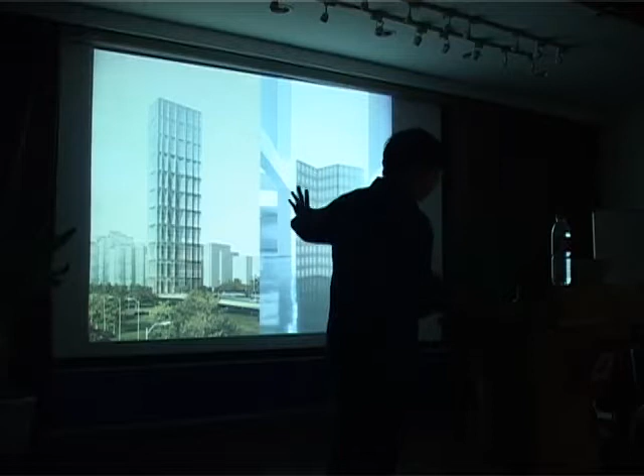We'll talk about the other project though. So what you're looking at again, in dimensions and scales—this one on the left is 200 meters tall, the one on the right is 2 meters tall. Formally they may look similar, but of course they're different projects.

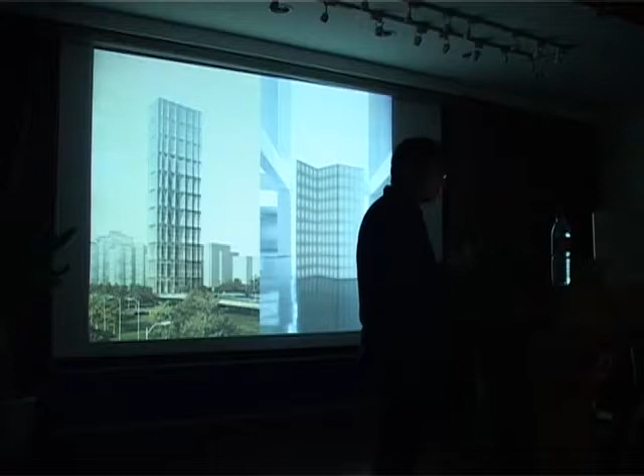But I'm arguing that, in fact, it's really not 可大可小—you're either big or small. For design to really make sense, to make architecture something meaningful, you have to take care of the urban scale as well as the micro, the material scale.

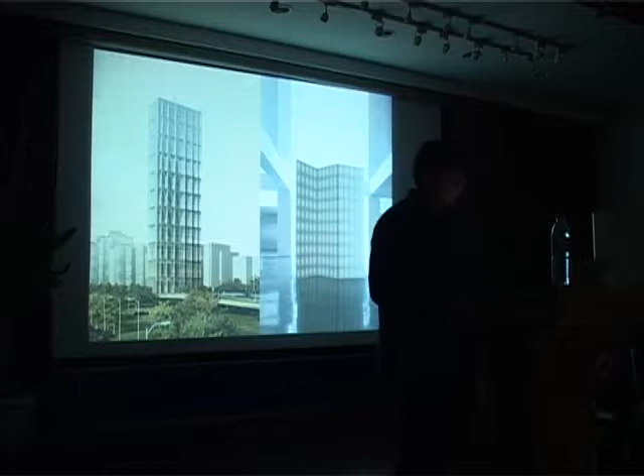So the real focus of this presentation really is from Metropolis, the two M's, M and M. So anyway, I'm going to show you a series of projects to give you an idea of the two scales. But again, really the important part is what issues these scales would bring.

So the first project is in Beijing, and you see Qianmen, the front gate. We're doing an urban regeneration, urban design project.

Actually, if I could have a laser pointer by any chance. If not, that's okay. I don't know—I have a device up here. I don't know what it is. Probably... excellent. This is a little on the stylish side. All right.

Okay, I was talking about Qianmen, which is right here. This is Qianmen Square, and this is the central axis of the city of Beijing. So this street is Qianmen Street.

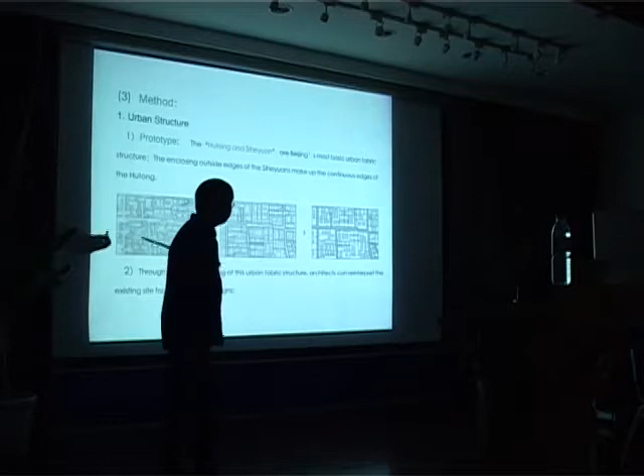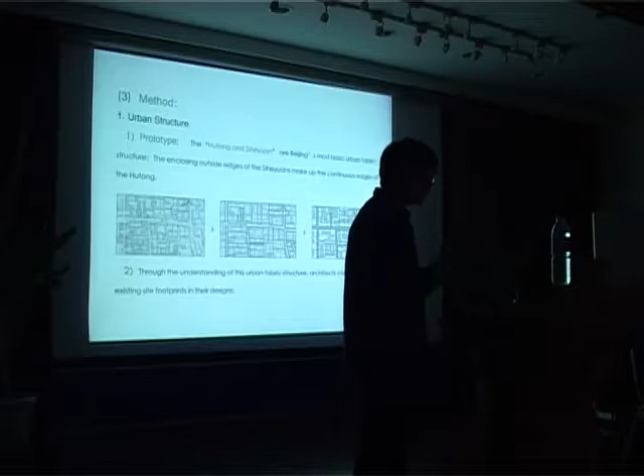So we started by looking at some old city maps, and that's from the Qianlong era—a very accurate map of Beijing. That's one of the major little streets. It's very narrow, but in Beijing people's minds it's no longer a hutong but a little street, called Fresh Fish Mouth, 鲜鱼口, because that's where the fresh fish used to come in. We were studying a number of things, particularly the scale and density.

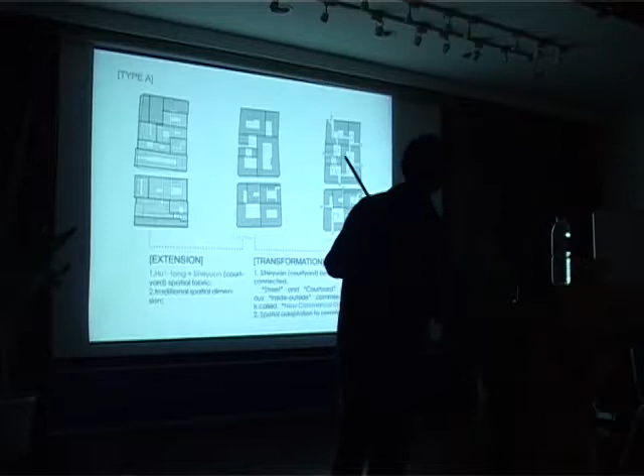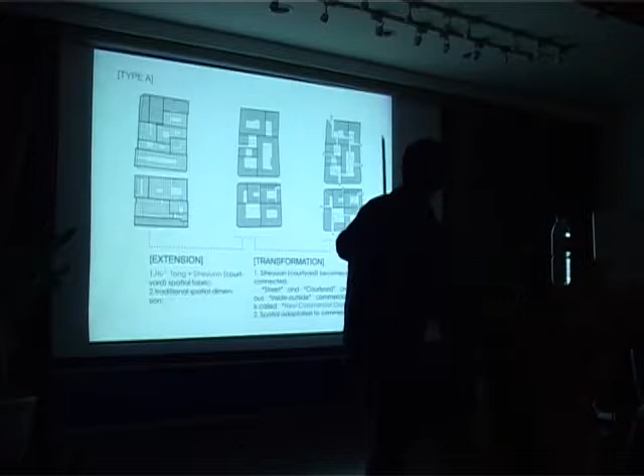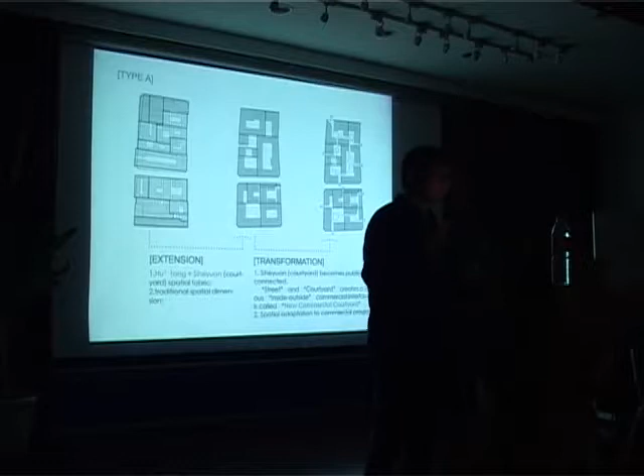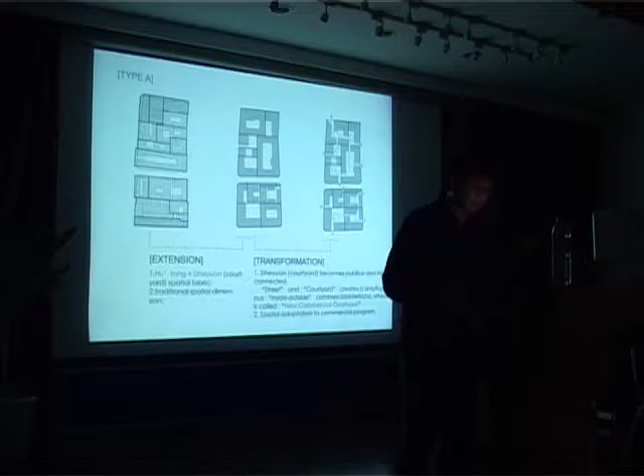And then we developed a number of strategies. Since the old courtyard houses are gone, we used only the footprint to generate the floor plan for the new architecture, and reorganized the courtyards so that people can go in and go through all of them without getting lost. Since it's public and commercial, the new way of experiencing the courtyards really has to be different.

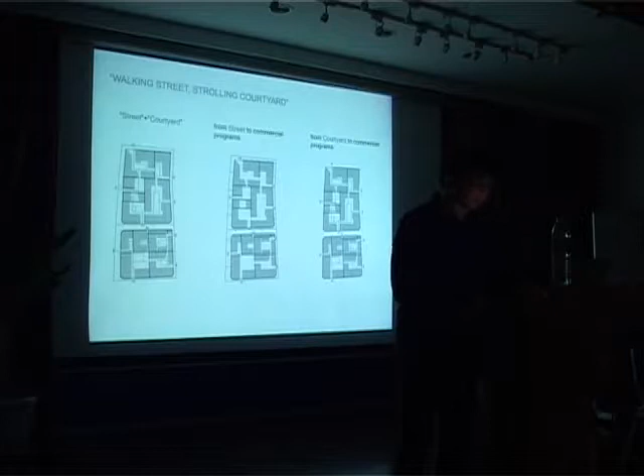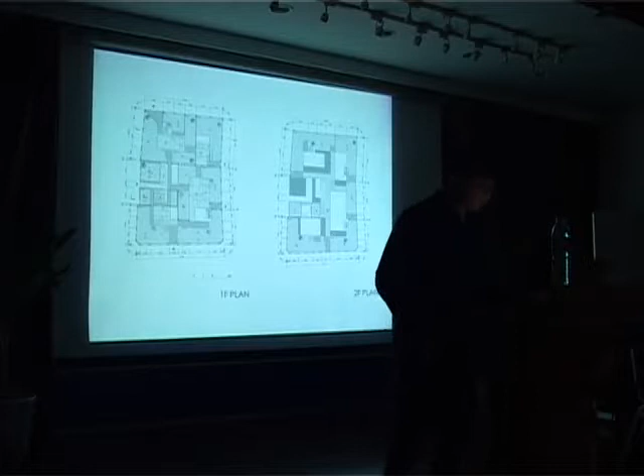So that's just the study of one type of experience, and that's the floor plan. This bit essentially is being saved from the old buildings. So the idea here, as you can see, is not so much the preservation of the old artifacts or buildings, but the preservation of a kind of architectural experience, and the preservation of urban fabric. That's the kind of agenda we set up for ourselves.

So here again, the fabric reflects how people used to live. For a number of decades there was a lack of housing, and a lot of additions were built by the residents themselves, of a very poor quality. But we took that kind of density as a reference, to regenerate a fabric which reflects that process of reinvention and redesigning.

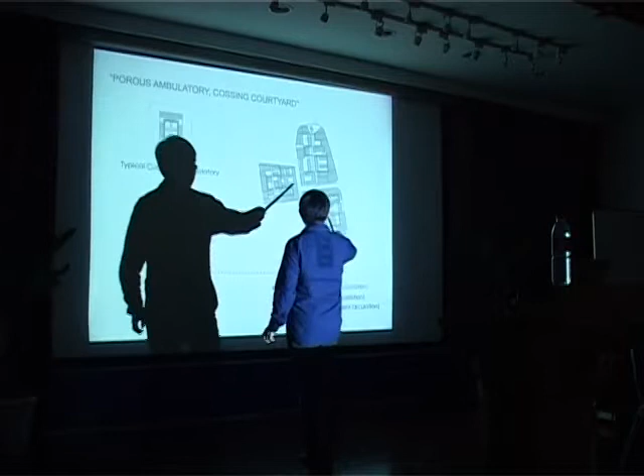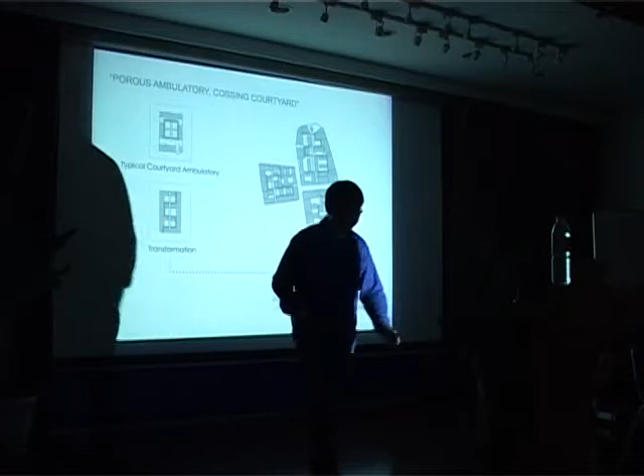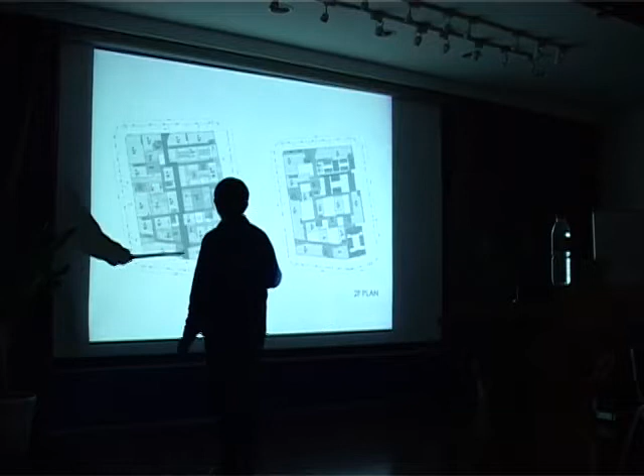And here again, there's a design for an easy way to experience all the courtyards, with possible options—you can go straight through, or meander through here and there. These are three blocks, of course. That's a project we've been working on for over a year. Again, only a small portion here and here are preserved old buildings.

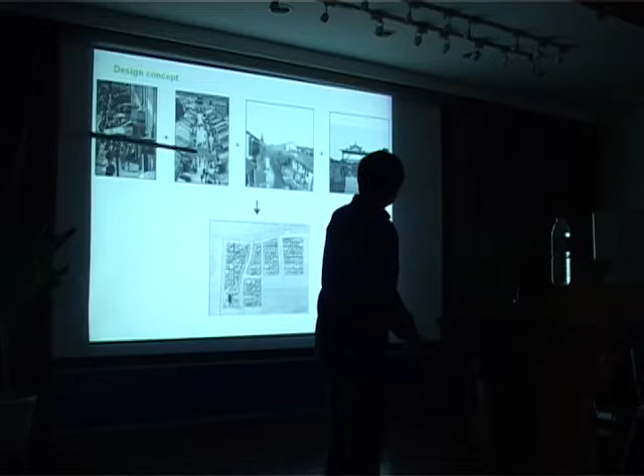And then we were drawing from all these experiences, mostly from this part of China anyway. It used to be a lot of water towns in this part of China and so on. And this is our proposal.

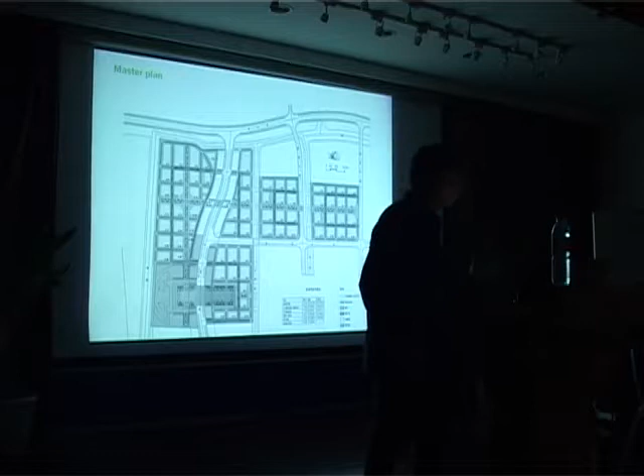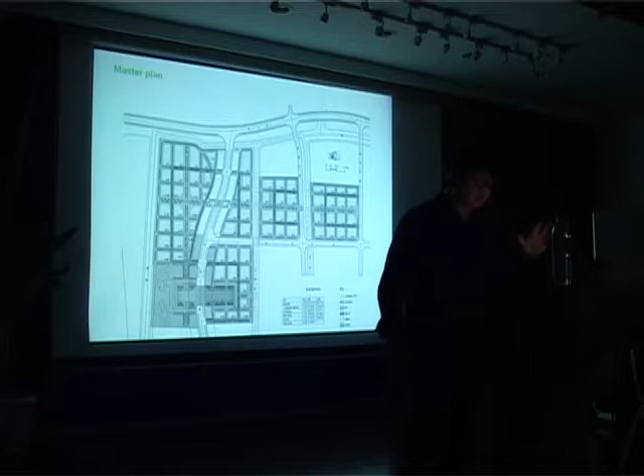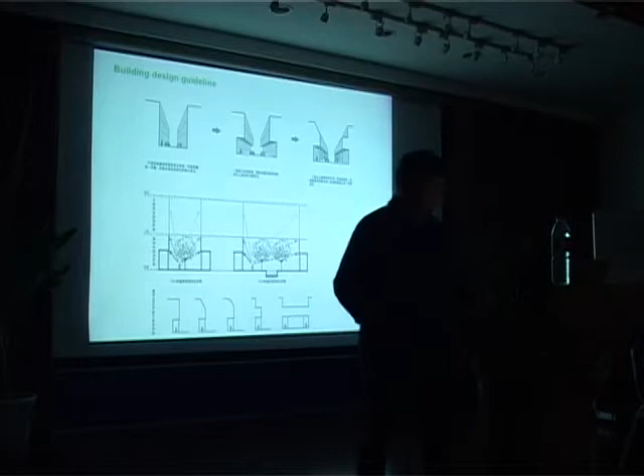If you look at the master plan, really nothing sexy, but it's just small and hopefully humane. So it's a big project, but the concern is how to make it small. And the urban grid—a lot of studies, and the street, and is it covered from rain and too much sun and so on. So anyway, this is all technical stuff.

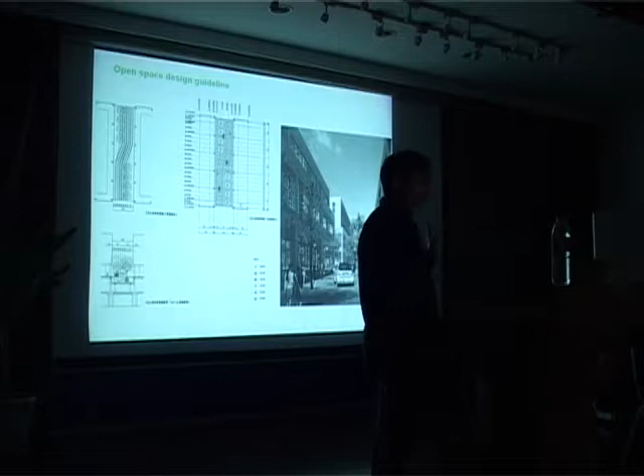And then how to put people and a car and a bicycle back into one street. This is something, if you're from the United States, you probably have not heard much about. Although I heard in New York City recently they did an experiment. But in countries like Holland, like Japan, they have done quite a bit.

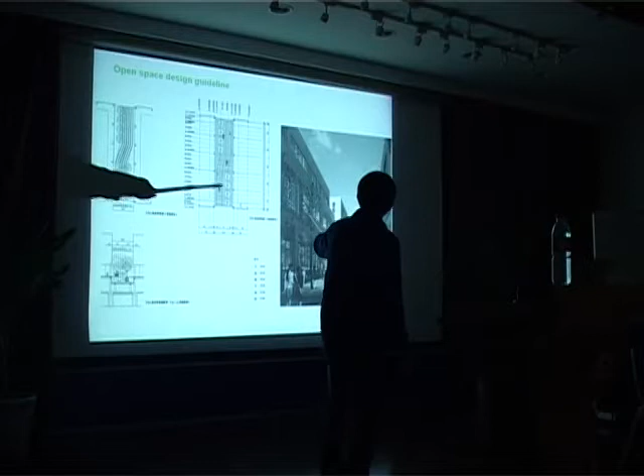The idea is to make the car turn every 50 meters or so, so that the car has to slow down. And in fact, if you want to rush to a place, you don't drive here—all the cars have to go extremely slow, and then it really makes peace with the pedestrians.

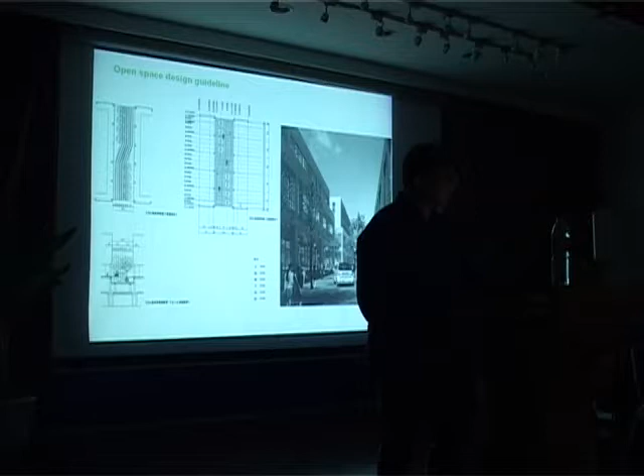So this is called a shared street. Actually, that's for me a better Dutch invention than the ones we probably encounter nowadays more often. So anyway, there's a pedestrian street and canal street.

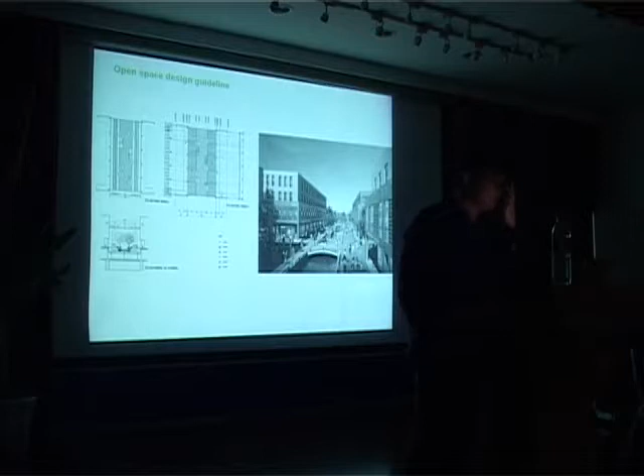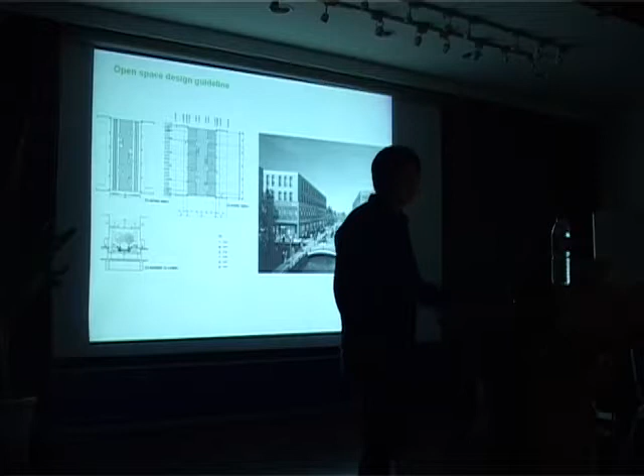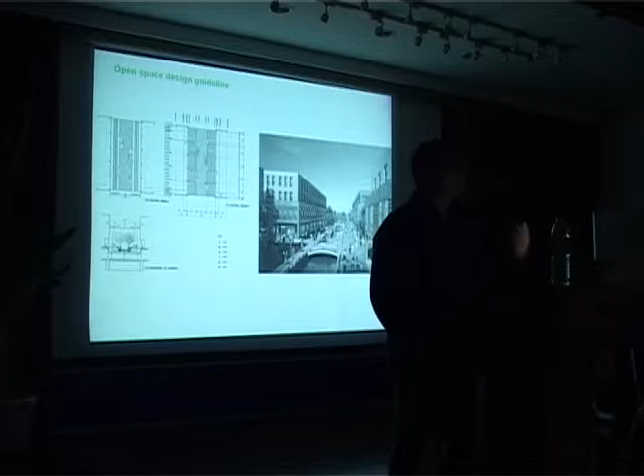And in China, you don't see urban spaces embrace or engage the water courses much, because rivers are controlled by a totally different agency. All they do is say, you gave me 100 meters, back off from me, and then I'm going to take care of the river. We're still negotiating with the Water Bureau. But if we want to make the water part of urban life, we want to make the water livable too. So that's another struggle we're having.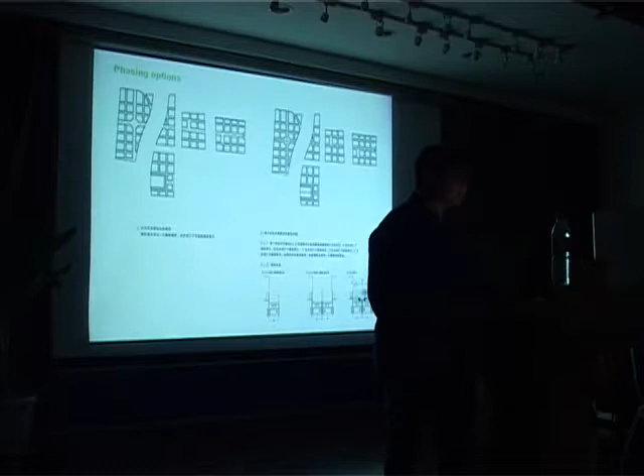This is so wide because the Water Bureau asked for it, but we're still fighting. So it's a fight all along. Anyway, there are more technical drawings as to how to, not just argue for this idea, but how to make it happen. That's what these drawings are about.

So anyway, there's something less conceptual. This is something we have already built in China, actually in Beijing. It's not a city, it's a research and development campus for one of the largest Chinese software companies. It's called Ufida.

So anyway, the way an architect works, as you can see here, could be very different. Often, from our office, we start to do analysis of all kinds. And what you see here is the notes we made from our conversation with the end users, meaning not the bosses of this computer software company, but the computer programmers. We initially thought they would start work 9 to 5 pretty much.

But in reality, they don't. They are more like architects. They may start late in the morning, and then they would go on and on. They may stay in their office even overnight and so on. They don't have a very healthy life, just like architects.

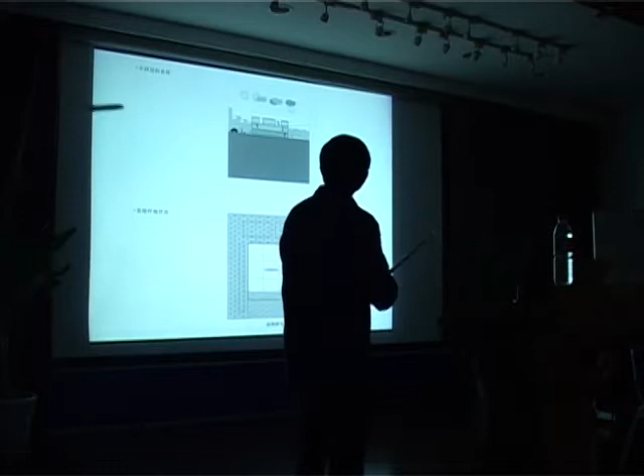So anyway, we were asked, as usual, to make an iconic building. They would love to have at least a 20-story building, perhaps looking like this bottle, who knows. But we were saying that you're on the edge of the city, and if you make a 3-story building, on the top you can be exposed to the sun, the rain, the weather, and if you're on the ground, you're connected to the ground. You can have your own pet, maybe.

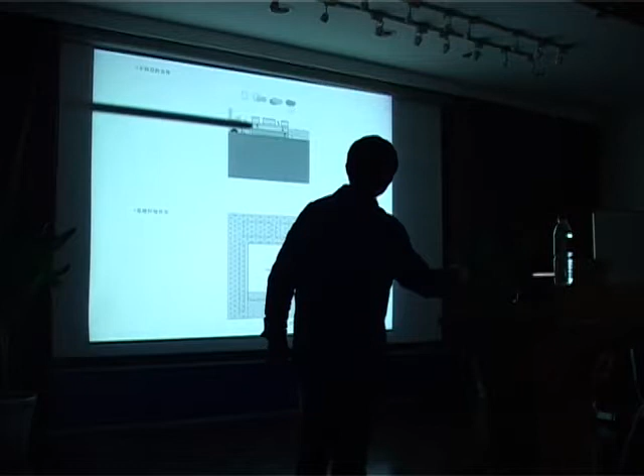And then when you're in the middle, it's also going to be a unique experience, different from the 3rd floor or the ground floor. So you should have 3 stories instead of however many stories. So they bought the argument. We made a 3-story building.

So this is the ground floor. You see all the different programs being put in. And then in reality is this. This picture is really the best I have for all the buildings I have done, because we always envision a way people would use our building. Do people actually do it or not? That really is something we have no control over.

In this case, for this company, now it's the habit or culture of the company that most people take a walk during lunch hour. I happened to be there on a very cold winter day, but people still come out, work for a short period of time, and then get in. So where do they stretch? That's where they do it.

So anyway, the idea, as I argued yesterday, is to help people live better. If they really do it or not actually depends, but sometimes it does work. And then there's an architectural idea behind it, which is to treat the building not as an object, but as the fabric, as I argued earlier.

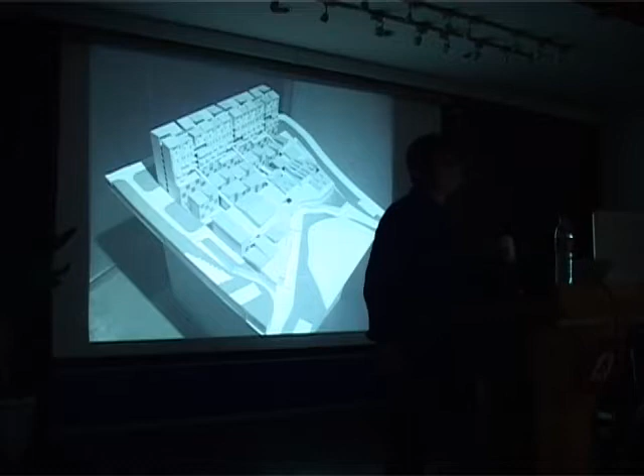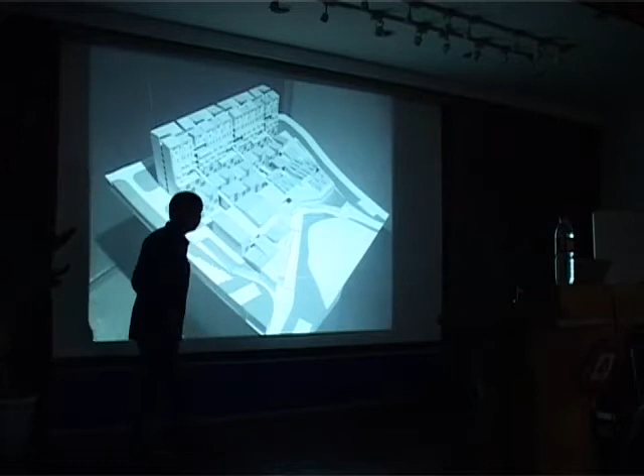So we decided maybe we could, or we rather should, use architecture to reconstruct the hill town. What you see is our proposal. This is actually a flat pad, but we built the building in such a way that it appears as if it's a building on a hill. That's how it looks when it's completed.

I'll show you another picture. You can see, in fact, it's a taller building in the back and a lower building in the front. The idea is, first of all, this reconstruction of a destroyed landscape or geography, but also to make a building, a rather big building, appear as maybe a miniature hill town. So the idea of a city, again, is still in the project.

So is this a street, or rather because it's outdoor, it's actually just an open air corridor in the building, and so on. Let's see. So anyway, that's again a big project, but yet it's not a city, much smaller than a city, but addresses urban issues. And another project is even smaller, is outside of China.

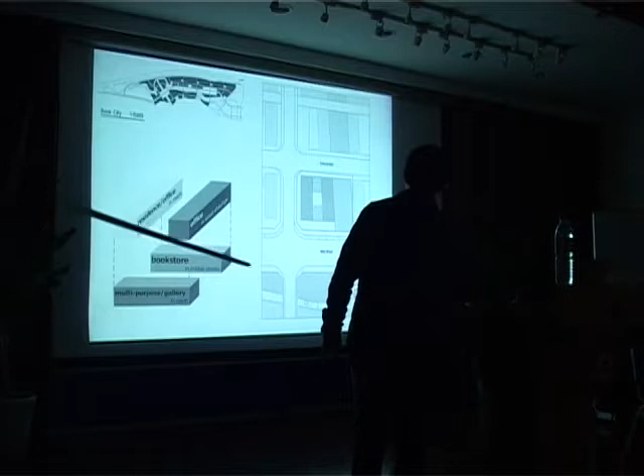It's in the town called Paju in Korea. So we designed a building that would reflect the urban quality of the site. Actually, this is a pedestrian commercial street, this is a vehicular road, and this is a secondary, quieter street, and this is a public green.

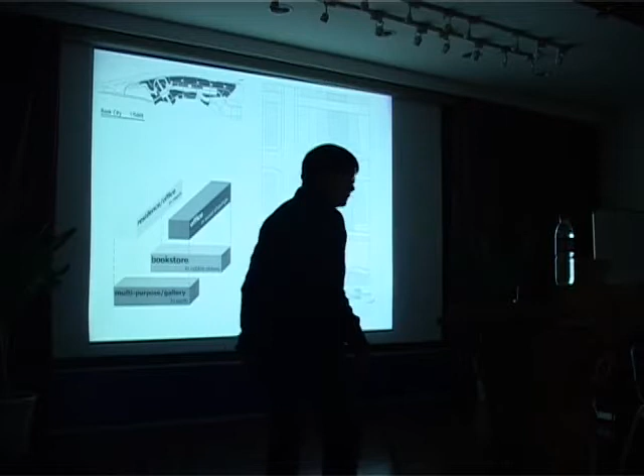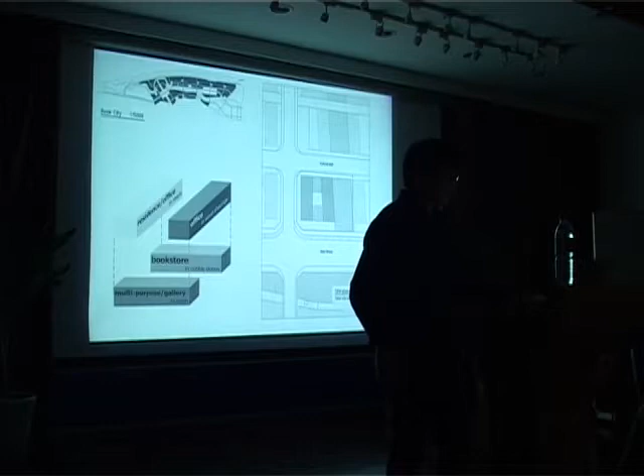So basically, you can see we put the commercial wing on the commercial street. This is a rather enclosed part of the program because it's a publisher which makes music, so we have a rather enclosed volume there. Offices, and some of the residential components combined. So together, as if 4 little buildings would stack up to make a courtyard building in this case as well. And then we used different materials.

However, we had to do one major change to the project because, for the economic roller coaster, the way architects work, even Chinese architects could be too slow. By the time we had to build the building, our client was not able to afford the 4th building, and that's why it became an open roof garden here.

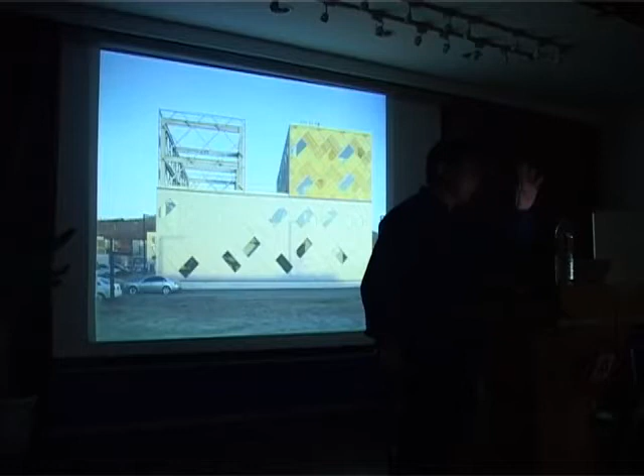Hopefully, if they need it, they can enclose it and have more spaces. We use different materials to address the differences between these buildings - you're looking at wood, and corrugated sheet metal on the lower part. This material is the least polluted and the most clean - it's air. So we use air as a material.

Just a close shot of that building. We actually designed this kind of window and facade system - it's probably pretty obvious here. A fixed piece of glass for view and for light, and then for ventilation, and then we have that opaque window.

So a small building isn't about how, in a metaphorical way, it would relate to a city, but rather it responds to a set of city conditions in such a way that the design makes sense. For all the buildings we've done, on one hand there are urban issues, and on the other hand, because our basic building blocks are materials, materials for us is always a very important concern.

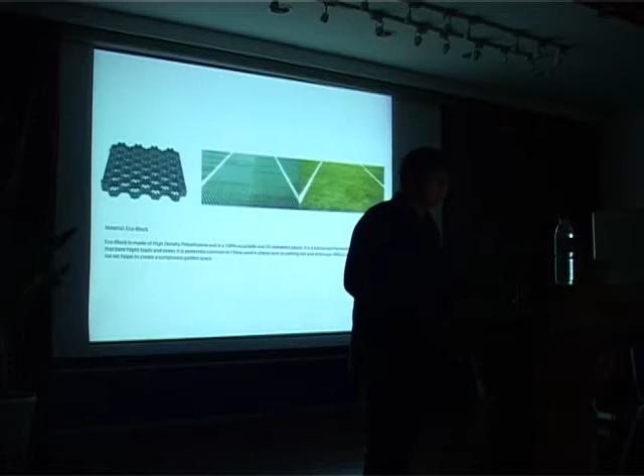Our office has been using a material a lot, called eco-block - it's actually polyethylene. It's for paved driveways and parking lots, I'm sure you see them around in Shanghai. They're called eco-blocks because grass can grow through them - the idea is eventually you don't see them, but in reality you do. The green color is intense and rather ugly.

However, we thought the green, bright and intense, worked pretty well with the intense and bright red bricks of V&A. Too bad it wasn't Christmas - that's in the summer, so we built this summer pavilion using this material. It's 100% recyclable and a very light structure, so it doesn't require foundation and so on.

Before we did this project, still at V&A, we used the same material to build our toilet, a bathroom for our own office. We didn't use the green ones this time. Again, we didn't need to make a foundation, and it's very light in terms of weight and in terms of brightness.

Three simple details - this one is the one I'm most proud of. This is bubble wrap being cut into strips, then we roll them up and put them in. So they're called bubble wrap sushi - sushi roll probably should be the right term.

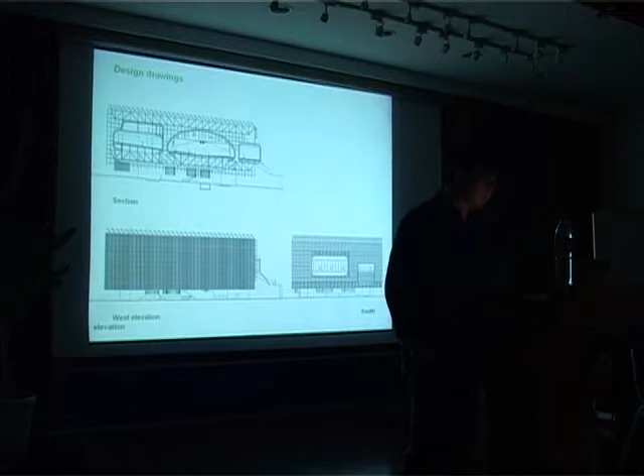Here is for the Shanghai Expo - we are working on the pavilion, again using lots of plastics. This is a polycarbonate we are using. These are technical drawings, a model, and the ground level. Basically, the whole building on the exterior is made of plastic tubes - it looks more or less like this.

So what it does is something like that - this is a mock-up in Shenzhen, only a little corner of the building. With LED lights going through it, also water for solar energy collection going through it, and water for mist-making going through the whole structure, the structure performs as a show.

So you see light, you see water, you see mist, and so on. The LED light, because the building has a thickness, a visible thickness, so you see the LED light doing not only on the surface, but really having a 3D effect - a letter would be able to turn and push back and forth in the depths and so on.

Here's the construction site, and you have to come back next year for the expo - it starts on the 1st of May.

So anyway, I think this is the last project. What you're looking at is a so-called CNC milling machine, again in Shanghai. The way we use it is to carve out a piece of plastic - in this case, an American product made by Formica.

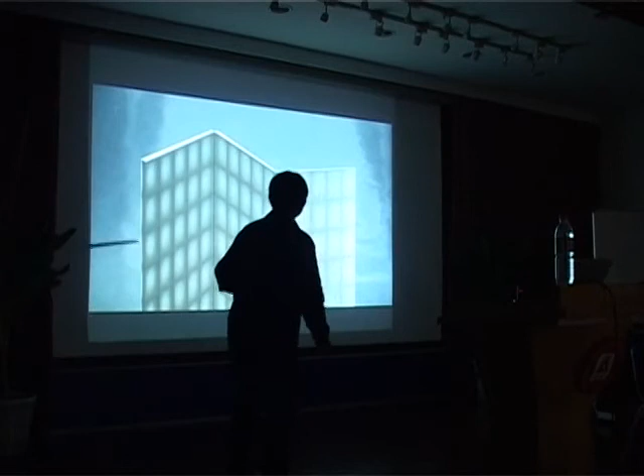So it's getting small here, or rather getting away even from architecture. Here you can see the 4 centimeter to 4 millimeter gradation built into the thickness of the screen, and you can see this gradation of translucency, or the light change across the whole screen.

Too many pictures. We used to dry gourds up, cut them, and scoop out the inside to have a utensil you can use for scooping rice or water, or to keep things. We took that idea and made it into a set of dinnerware.

These are the serving plates. This is the individual set. When they open up, you get your soup bowl, your rice bowl, this plate and that plate. We hope that, because if it's all circular you waste a lot of space on the table, here they're more packed. So this is probably a better picture.

And then these are the baby gourds, just for your soy sauce and so on. And then for the wine, this is for Chinese wine.